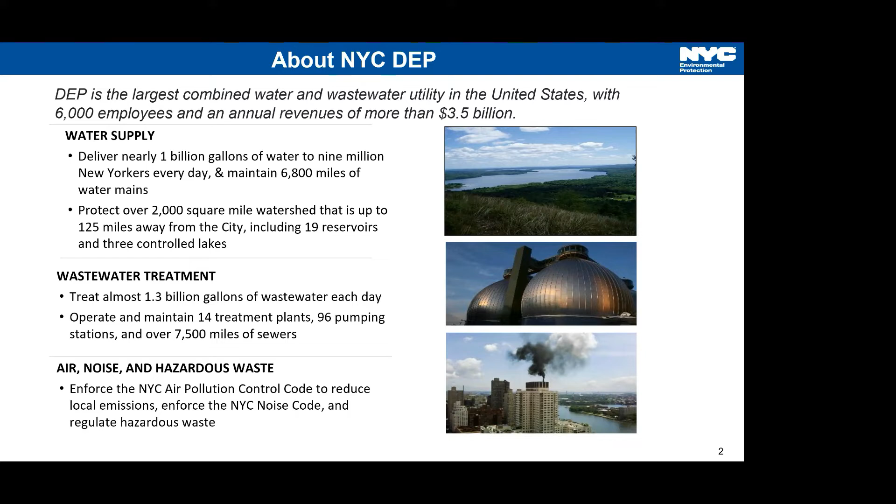So just a brief overview. Now I want to get into what the city is really going to do in light of climate change. So we are very much aware of this fact - it's not a hoax. And we've been working very closely with the New York City Panel on Climate Change.

And we are fortunate enough to have these very well done local projections. You can see here the summary - everything is expected or projected to increase, ranging from heat, precipitation, to sea level rise by 2050.

And most recently, unfortunately, we all experienced last year the storm Ida. We know those kinds of cloudburst events, the high intensity, short duration events, are detrimental for the city because, as you all know, 72% of the city is still impervious. So when rain drops on that impervious surface, it creates these kinds of conditions and results in tremendous flooding in some neighborhoods. The picture on the left is indeed from where we work in Far Rockaway in Queens, and this is the day right after Ida - I had the opportunity to take it from one of the buildings surrounding Far Rockaway.

So what I'm going to be talking about today - yes, these events are going to become more and more common, and the city is aware of that. What we are doing is really putting our unified forces together with all the city agencies, ranging from operations to infrastructure build out, and how we can make the city more green and more stormwater management friendly in the upcoming years. That's kind of what I'm going to be presenting today.

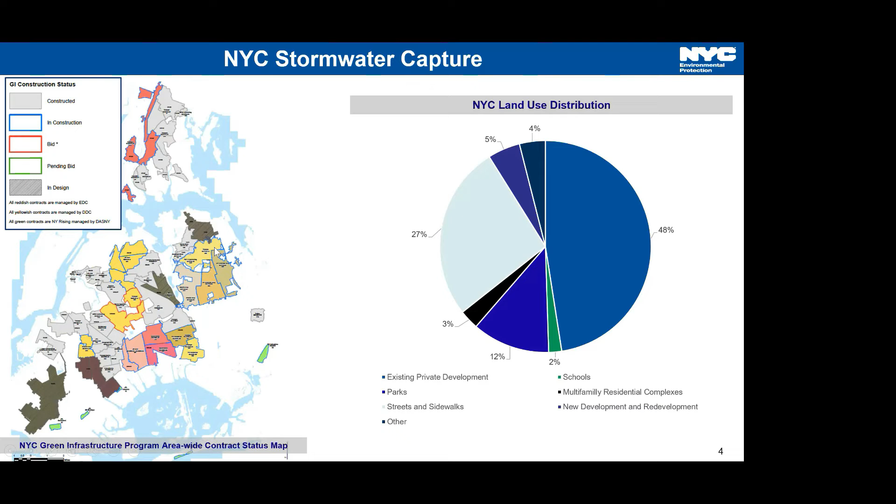So those asset types that I mentioned, as the years passed, in the beginning of the program you are all familiar with our standard rain garden design, which had a curb inlet and an outlet with a tree guard, vegetated infrastructure in the middle, and trees. Over the years, we realized that this one asset type is not necessarily applicable to each neighborhood's characteristics.

So we had lessons learned from the field. In the past, we were rejecting some of these rain gardens because the neighborhood characteristics, the siting constraints, didn't enable us to build them. So with that lessons learned, our designers started taking those neighborhood characteristics into the design consideration.

And then we said, what about the commercial neighborhoods? What about those industrial neighborhoods where putting a rain garden is really not going to be well maintained because it constantly gets truck trafficking and constantly has those outside pollutants? So can we still manage stormwater, even though we have site and neighborhood concerns, but do it differently?

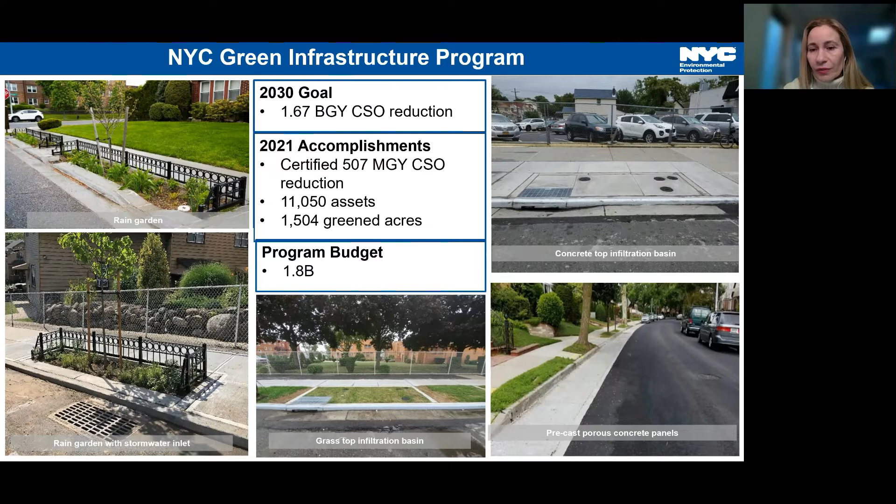The sister version of this is our grass top infiltration basin. So if the neighborhood has these grass patches, we call it in-kind replacement, and it helped us with some neighborhoods in the city. Sheena knows this very well - we got some community pushback and we were able to keep building our green infrastructure because we said your neighborhood is not going to change. It's an in-kind replacement, so we do not have to reject those sites but keep building the stormwater infrastructure.

And then the most recent addition that I am glad to announce today is our porous panels. You may know that we've been piloting this technology for some time in Rego Park, which is very close to where we work in Laurelton. And they've been there and functioning pretty well.

So there are those neighborhoods, as you can see, where the sidewalk doesn't provide the necessary space to build green infrastructure, or we have tree issues or tree concerns. In the past we were rejecting these kinds of neighborhoods, but now we are going back and applying a porous panel version of green infrastructure, which still makes the area go from impervious to pervious. We do provide that stormwater management given the neighborhood concerns or constraints.

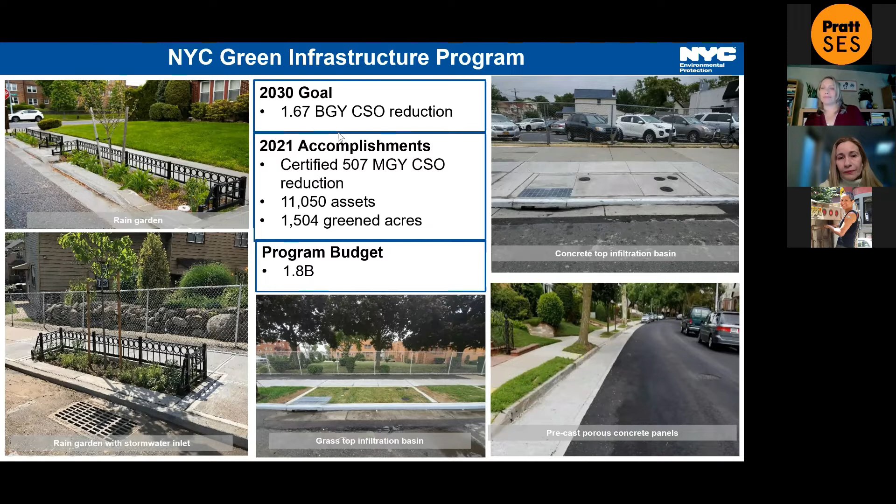So I talked about our interagency success. As you know, 30% of the city is now heavily saturated with green infrastructure, with our right-of-way assets. We said we have to really take this program to the next level and start building these relationships with our three key partners: the Parks Department, Public Schools, and NYCHA. Those are the largest city agencies who own the land that we can indeed retrofit.

So that's why we started these partnerships, and this is a current recap of where we are. We are looking at more than 400 sites encompassing parks, public schools, and NYCHA housing, constantly retrofitting those impervious lands. We are also providing that infrastructure lift, like the NYCHA housing. We have done many parking lots, which the NYCHA residents are very thankful for, and while doing that infrastructure, we are also helping with the drainage of the site.

After we finished our job, we received some thank you letters from the NYCHA leadership team telling us that those NYCHA housing blocks during IDA didn't get flooded because of our green infrastructure.

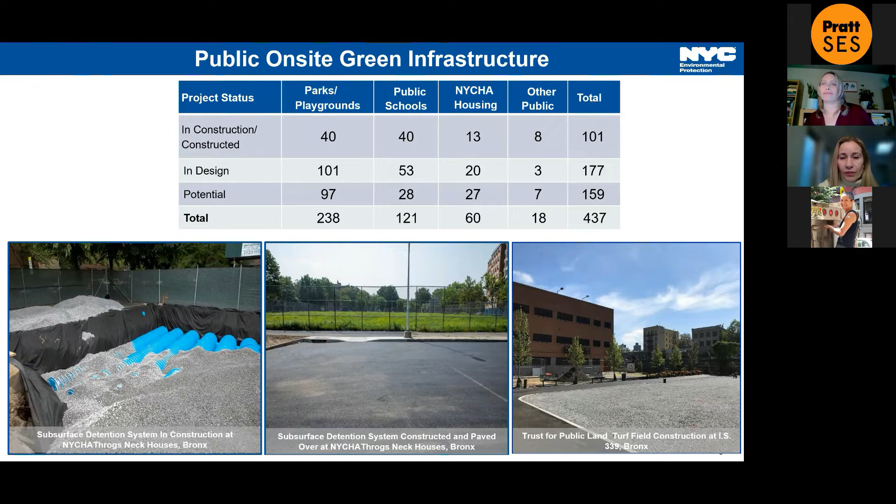I added this one slide here. I don't know if Karen is joining us, but we've been working very closely with CB8 and the Bronx Council for Environmental Quality, which really started and shepherded this wonderful opportunity many years ago. Now we are taking it to the next level and actually making the Tibbetts Brook daylighting happen, hopefully before I retire. We are having a stakeholder kickoff sometime end of March or April, and we'll make sure you all get invited. Mikhail is coordinating that effort.

As part of this project, this is going to be our largest green infrastructure project in the city. The whole idea is really to daylight the brook, which used to go to the Broadway sewer, take that flow out of the sewer system and daylight it through Van Cortlandt Park, all the way to the CSX property, which we are currently negotiating to purchase the easement rights for, and then connect back to the river where our current CSO outfall is.

This one project in totality is going to reduce the CSOs by more than 220 million gallons, and it's going to be the most cost-effective project, where on current estimates we are going to be paying less than 50 cents per gallon. There are many moving components. It's not only a water quality project in terms of CSO mitigation, but we are working and partnering with the Parks Department to create a greenway adjacent to our daylighted portion, which is going to become what I call the High Line of the Bronx. So we are very excited.

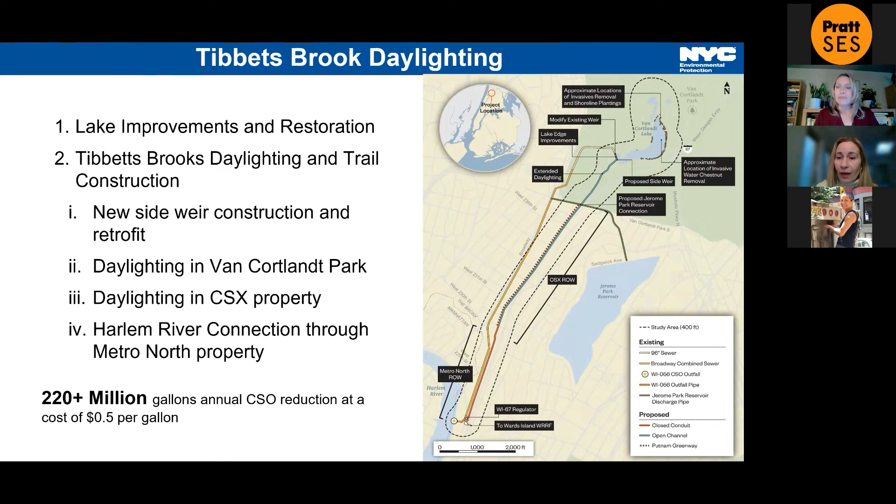According to the current schedule, I don't think I added it here, but we are hoping to kick off construction in 2024 to 2025. That's the timeline we are running, and we hope to keep that timeline, and the project is fully funded.

So you may ask, okay great, you are taking advantage of the city-owned land, your partnerships, and so forth, but what about the rest of the 50%? That pie chart I showed you, the rest of the 50% of the land in the city is owned by the private sector.

So indeed, we thought about that. We worked with you over the last several years to come up with this very creative contracting framework, which is almost fully funded at $53 million. The idea is, can we provide enough incentives to large private property owners to incentivize them to build green on their property? That is the whole purpose of this contract—find those partners in the private sector that own these large parcels and retrofit their land.

By doing so, they benefit because they get an upgrade, and we benefit because we use that land to store stormwater management for fighting climate change and providing less imperviousness to the city. So the whole contract is a very innovative way of doing this.

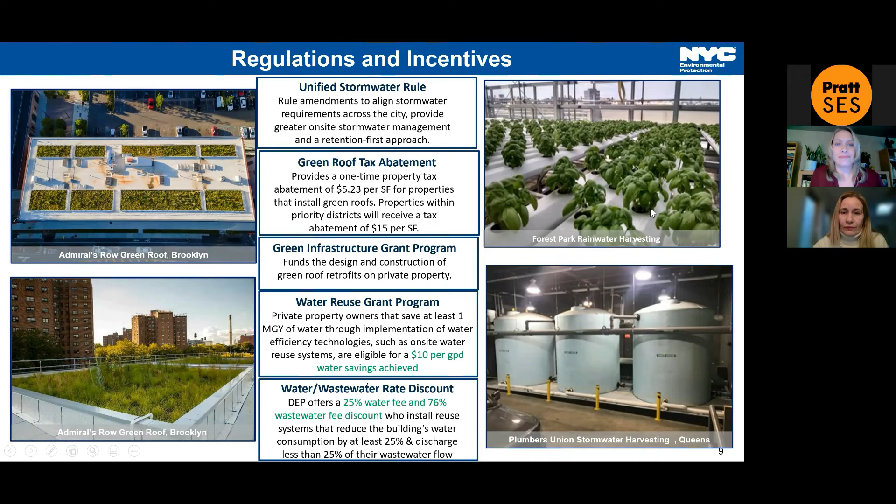I'm not going to talk much about the unified stormwater rule since Melissa will cover it, but this is tremendous news and a great effort we've worked on for the last 3 years to change our stormwater regulations and integrate stormwater management into our regulations, particularly taking advantage of redevelopment.

Around 1.1% of the city is redeveloped every year, so why not take advantage of that redevelopment opportunity and change our regulations to make sure every private property owner who triggers the new rule has to comply.

The new rule is triggered by disturbance of 20,000 square feet or more of soil, or adding 5,000 square feet or more of impervious area. If you trigger that, you have to comply with our new rule, which is really based on retention first.

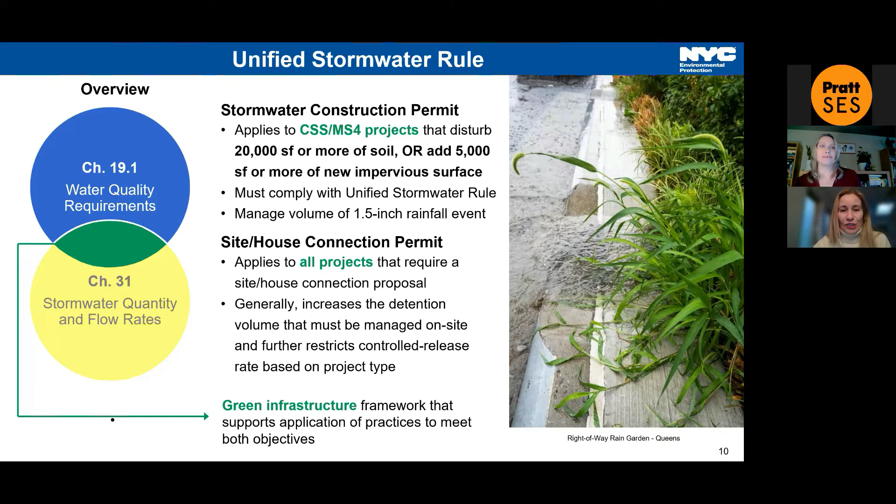That's what we're encouraging private property owners to do - they have to see if they can retain first before exploring other options in our toolbox. Melissa has a great presentation, so I'll let her speak more on that.

I mentioned reuse, and why it really can't be discussed only as water supply - it is indeed part of our stormwater management. So we formed this integrated water management group here in DEP, focused on bridging the gap between our water supply portfolio, established under demand management, and bringing that demand management and water reuse into our stormwater management portfolio, and how we can utilize that tool in the toolbox to incentivize projects.

So far we've done that very diligently. There are a couple more examples, but I can't share them all. I'm highlighting the Forest House and the local plumbers union, which are indeed reuse of rainwater.

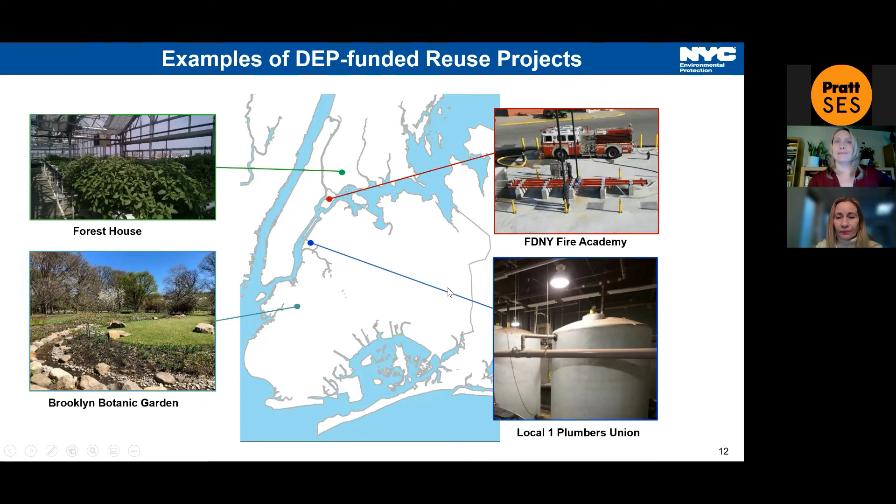This is used for irrigation purposes. The local plumbers union uses it for toilet flushing purposes. So this is how we're bridging the gap, looking at our reuse portfolio and how we can take credit, either for CSO mitigation or stormwater management credits, by doing reuse projects in the city. There are many examples we can talk about another time.

So, talking about all this, where are we really going to go next? That's the question our commissioner asked us: what is one thing that keeps you awake at night? My answer is, how are we going to take what we've done in the last 10 years to the next level?

We know climate is changing. We know what we've done is great, but it's not enough. So what is the next portfolio for the city to start contemplating, planning, and putting the wheels in motion?

To help with that planning effort, we said we need to know which parts of the city are really vulnerable when it comes to flooding. So we completed this tremendous effort under Melissa, working with our City Hall partners, and produced flood maps for the whole city - the 50-year, 100-year flood maps, as well as the 10-year flood maps. Now we're taking this as a baseline, giving us an indication of which parts of the city are most vulnerable.

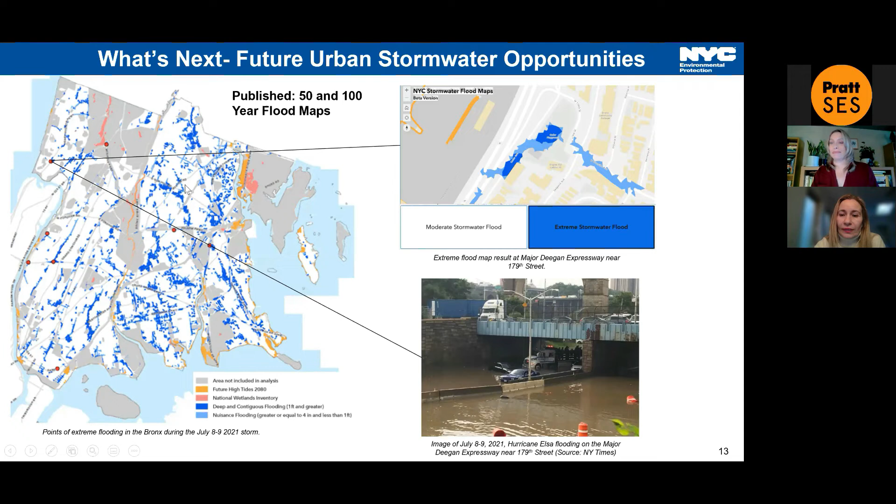We're now going to apply our new cloudburst management portfolio, which Ellen will be talking about next week, to bring green solutions coupled with gray solutions for flood management efforts, using temporary space in traffic and open areas to do so. This is really taking green infrastructure to the next level.

The cloudburst management approach will target more intense rainfalls. We're upping our design criteria to 2.3 inches versus the 1 inch that green infrastructure is currently designed for. And we're going to look at existing areas again.

Go around the block one more time, look at which neighborhoods are most vulnerable, bring in the social vulnerability index, and look at how we can bring cloudburst management into those neighborhoods - using nature-based solutions coupled with our drainage gray solutions to slow, delay, and divert stormwater. This is the next generation of green infrastructure that we're now marching forward with in full motion.

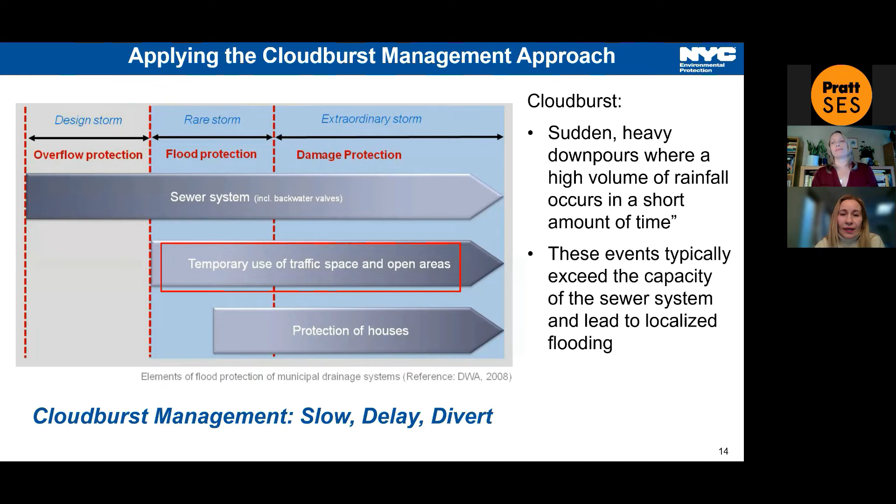We'll talk about this more next week. So, before the city does a larger program, just like GI or cloudburst, you all know we love to pilot it first.

So that's what we've been doing over the last several years. Before announcing a large cloudburst management portfolio, we said we have to test it in the field. And that's what we've been doing.

We have the Clinton Houses pilot in East Harlem. We are in the advanced stages of the South Jamaica Houses. Here you can see the different design of a basketball court - it's a drop basketball court, which is going to enable us to retain more water.

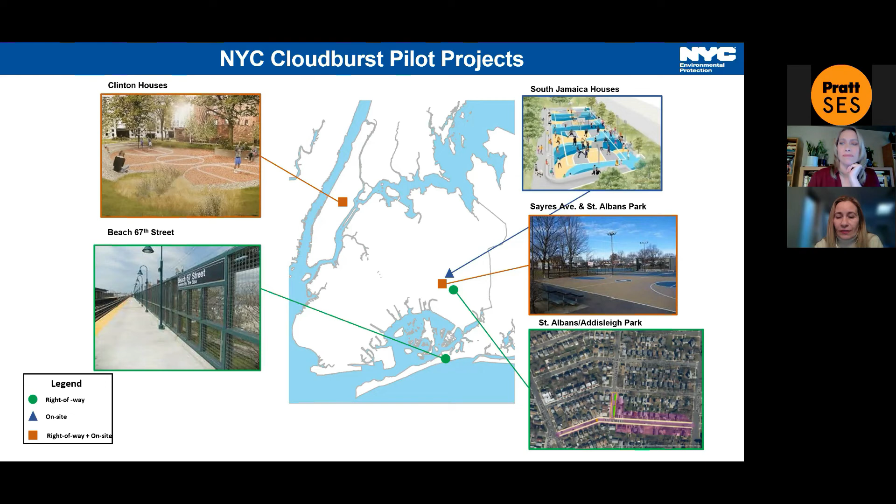And then we have a couple other projects that we are looking at in Sayres Avenue and St. Albans Park, working with the Parks Department. So these four projects are currently in conceptual or design phases for implementation and moving on pretty nicely.

And part of that portfolio, we always talk about right of way, which is the sidewalks or the streets, but there's great opportunity when it comes to the median. We formed this in-house design group because this requires very specific attention, under one of our staff, Teddy's, leadership, and his whole portfolio is looking at the medians in the city, identifying how we can bring flood mitigation and stormwater management to those neighborhoods.

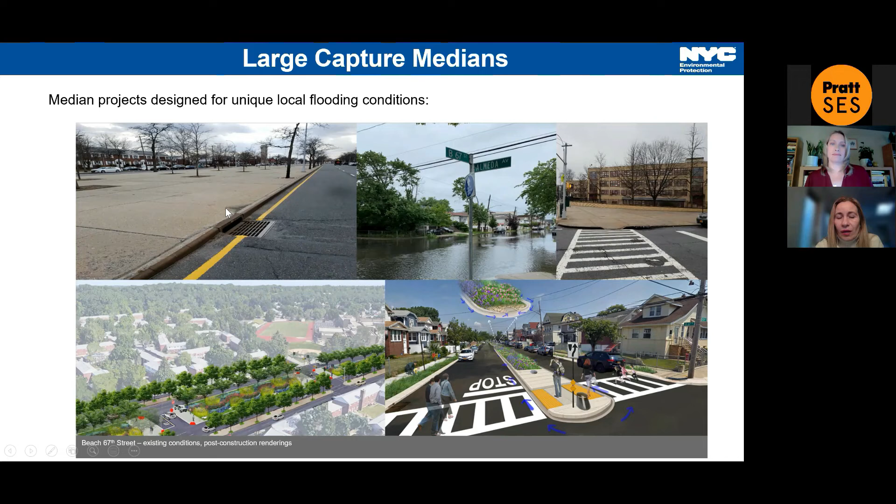So these are some examples I'm highlighting here. The top one is Beach 87th in the Rockaways - this is what it looked like before we designed it, and this is what we are converting it to. It's really uplifting this community, not only reducing flood risk, but also beautifying that impervious area, which is going to become more green and more community friendly.

So everything I've spoken about so far is all our watershed efforts - what we're doing in the watershed, how we're retrofitting impervious land, how we're bringing more stormwater management with this creative thinking. I don't want to pass on, because it's usually not seen as a green infrastructure effort, but indeed we have this coupling we've been doing: watershed management, storage, diversion, coupled with the end-of-pipe water quality treatment.

And what I mean by that is wetlands. Tidal wetlands are proven for water quality improvements in many places in the nation, including Chesapeake Bay. Most recently in our wetland portfolio, this is what it looks like in Alley Creek after we restored those wetlands.

Now we are adding this ribbed mussel portfolio to it, and together we are calling them our green water quality treatment practices. These are end-of-pipe treatments - it's not disinfection, it's very nature-based. It does provide water quality benefits, mostly on nutrient and TSS reduction. Science really backs that up very well.

And currently we are testing whether they even provide pathogen reduction benefits. So that is the science that we have, and we are working very closely with CUNY and other state colleges to prove that there is science behind these systems providing that pathogen reduction benefit.

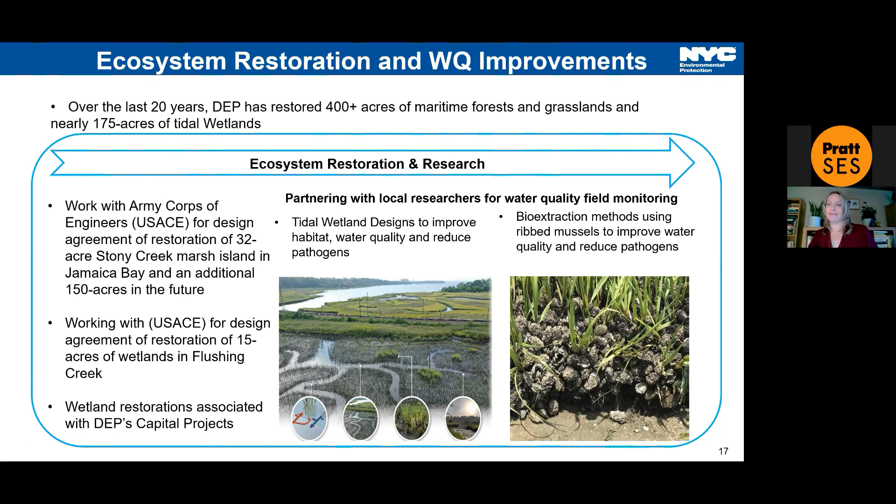So I know I'm coming to an end of my presentation, but before finishing up, I really want to talk about the MS4. In my mind, MS4 and CSO are not separate - it's one city, one goal, one climate resiliency. But the way we are structured and regulated is under two programs: we have a CSO consent decree, and we have an MS4 permit, which we've worked very closely with you all on.

So currently we are in the implementation stage. The second cycle of the permit was recently issued to the city - I hope you all had the chance to review it. We're hoping to finalize that permit. I think DEC extended the deadline to March 4th, 2022 to get more public comments. But we are happy that this program has been established very intelligently with all your support, and we are in the full implementation mode.

I'm not going to go over all these colorful boxes, but the permit has 12 provisions, and it ranges from BMP type efforts to illicit discharge elimination, to trash and floatable removal, and so on.

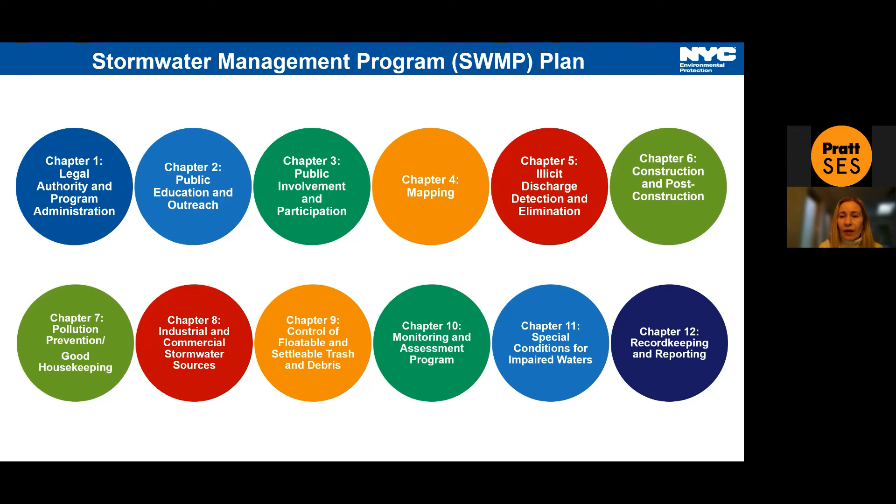In the new permit, you'll see some changes as we've taken into account what we accomplished. It sets forth what the city needs to do under this program for the next 5 years. We did an annual meeting and highlighted what we accomplished in 2020, going through all 12 provisions one by one. The bottom line is the city has done tremendous work under this permit for the 14 agencies regulated under it.

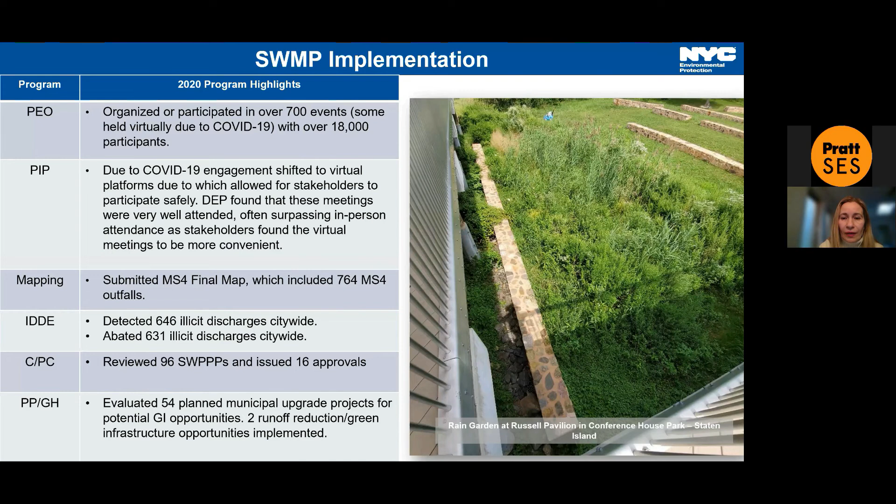It's a tremendous effort, with a lot of best management practice approaches we're implementing. They're not mostly structural, mostly non-structural, but this collective effort is really to make the city more stormwater management ready for the upcoming decades.

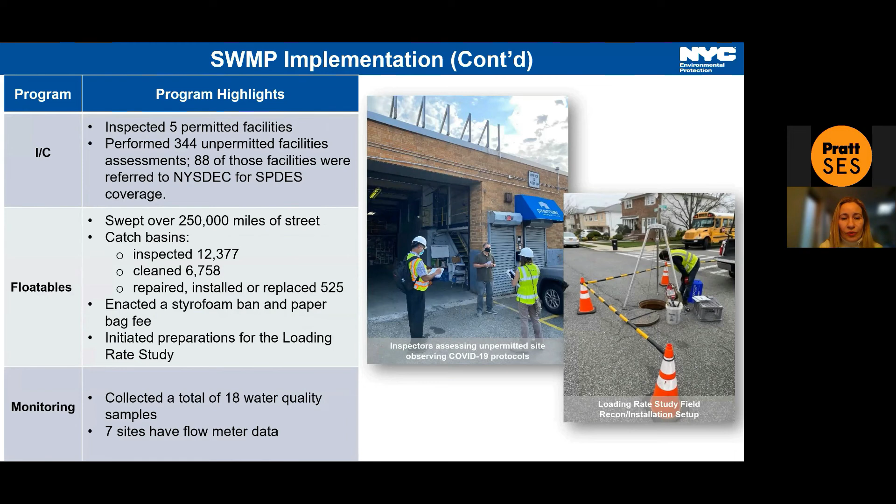These are some pictures our staff took, summarizing what we're doing under each program. It's a well designed program moving very nicely. What I really want to talk about next is, you may be asking: okay, you're regulated under CSO, you have an MS4 permit, you have a reuse program—how are you going to bring all this together so we can understand how they're all linked to each other?

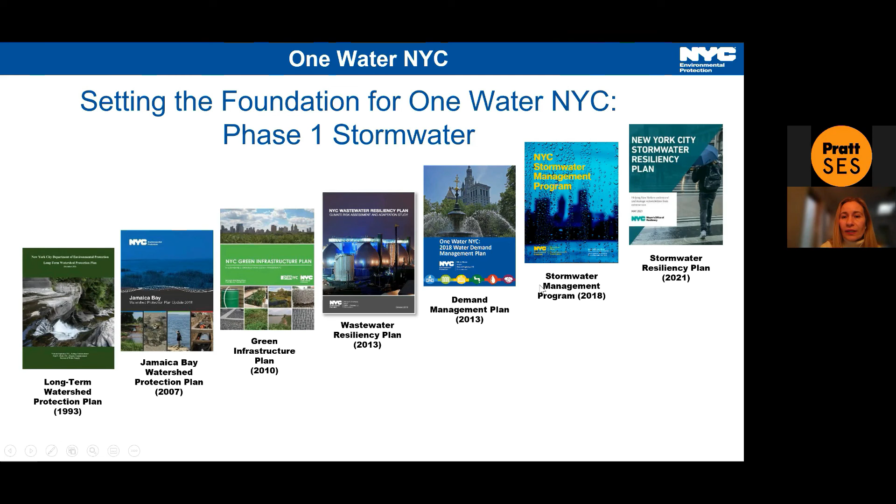To accomplish that goal, we kicked off this One Water NYC effort. It's One Water—not stormwater, not CSO, not reuse, it is One Water. Under that, we call stormwater phase one, our first phase. That's how we're going to net everything we've done in the past under the multitude of programs you're engaged with, under one new roof, making sure the city applies stormwater management as an integrated, more holistic approach.

The One Water NYC is going to have that goal: climate resilient stormwater planning. But we also want to make sure we're adding new metrics to our goal, like providing equity. Can we still do what we want to do but make sure it's equitable and affordable in terms of our rates? We want to make sure our infrastructure keeps being reliable.

Workforce development is a big piece of this One Water NYC phase 1 effort we want to bring up and work with you all on. How can we make the workforce an integral part of our stormwater management in the upcoming years?

I want to announce—Sheena, you probably haven't heard this—I got a Christmas gift from our commissioner. Right before Christmas, I was told I'll be leading the GI maintenance group. That's really going to make us focus more on this workforce and the integration of that maintenance group with our existing design and construction team. We're very excited with this integration.

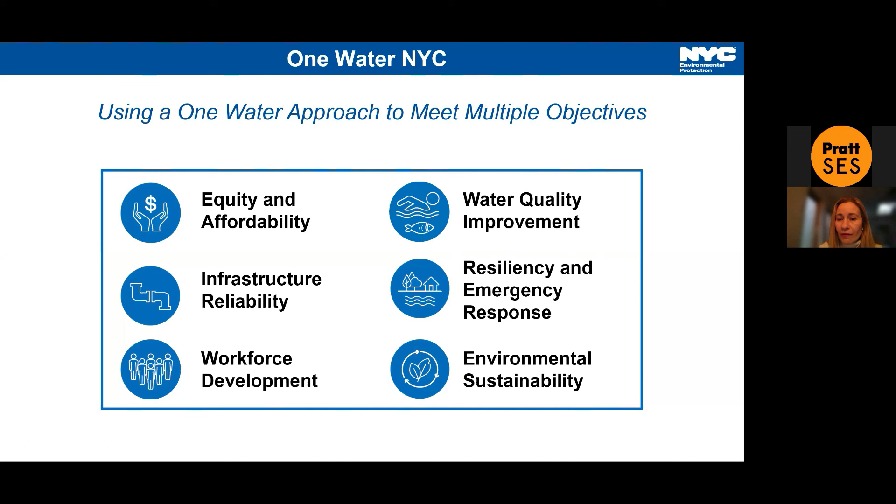We're going to be working on resiliency, emergency response, and making sure every effort we do is indeed environmentally sustainable.

I'm going to close off with this one slide. As you all know, we're having multiple stakeholder meetings on this one issue, but it's very important that as the city keeps investing and looking at new opportunities and portfolios, bringing everything under one roof under One Water NYC, we have to really look at our rate structure. I think Shino did this before we kicked it off—we have to look at what tools are in our toolbox for our rates and make sure all these listed metrics are met.

To accomplish that goal, we kicked off this new study, the Sustainable Rate Structure Analysis. We're in the early stages of that study, but we'll be coming back to you, I think next week or the following week, with another stakeholder meeting to provide an update and get some feedback.

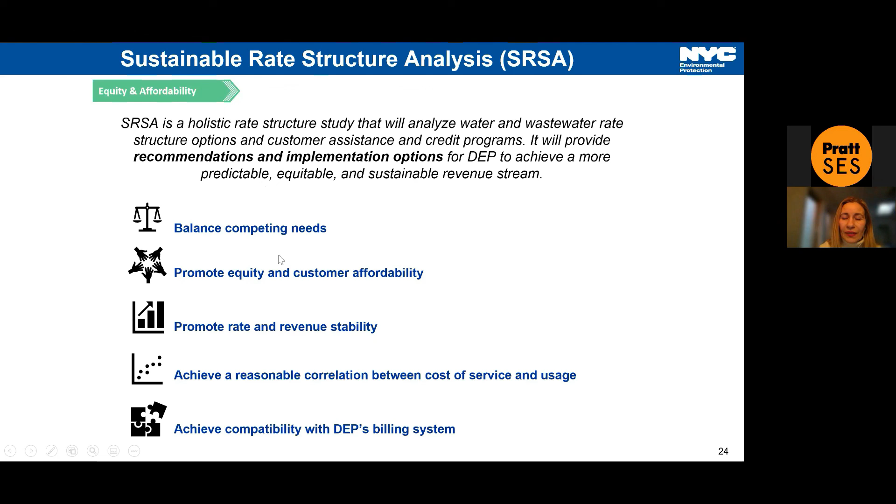That completes my presentation. I really would like to thank you all.